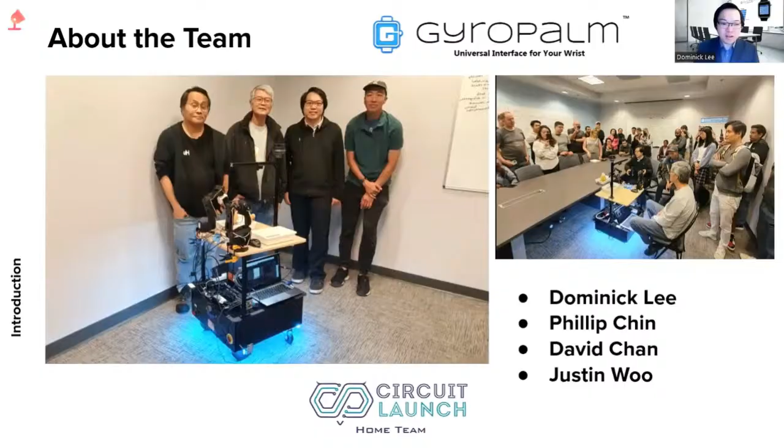Now, with that said, let me tell you a little bit more about myself. So, as you know, I'm an avid inventor, programmer, designer, and engineer. And I run a tech startup in California that provides a patented wearable technology which enables users to seamlessly control electronics, computers, robotics, and more with the flick of the wrist.

And this patented award-winning technology enables users not just to control robots, but to feel empowered and control them from a safer distance. Now, aside from that, I'm also a roboticist in residence at Circuit Launch. Circuit Launch is an innovation hub that provides labs and facilities for robotics companies and startups.

So as a roboticist in residence, I've helped various clients realize their dream use cases, especially when it comes to robotics, wearables, CAD design, and IoT-based platforms. Additionally, I'm also an honored alumnus from Purdue University, and I used to be the former club president of Purdue Mechatronics Club. It's always my passion to be able to help and lead where I can.

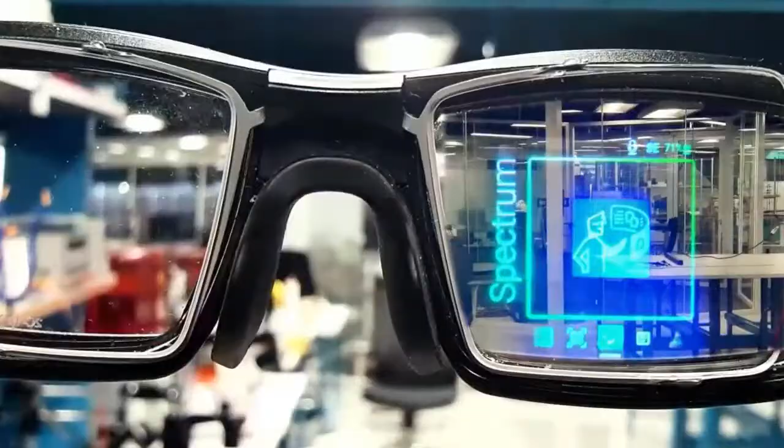In collaboration with Purdue University, one of my projects, the Gyropalm Vimpact Framework, which controls robotics, enabling them to be controlled by AR glasses and our one and only Gyropalm technology, has been featured and supported by the National Science Foundation. And some of my other works, such as the Lightbeam Flight Simulator, various workshops that I've led, as well as my discussion, my talk at Circuit Launch about AI and robotics.

These are some key highlights that I'd like to share about just things that I've done for the community and things that I passionately would continue doing as part of just exploring what's possible in the realm of innovation, robotics, and automation. Now, another thing that I'd like to share, which inspired me to build the project behind OmniFetch, is...

Our Gyropalm Spectrum product. It is actually something that's available on the market today, and it comprises of market-leading Vuzix AR glasses along with a Gyropalm wearable, all enclosed in the waterproof case.

So this is a very powerful tool, and it actually won the most promising innovation of the year at Sensors Expo. For those of you who don't know, Sensors Expo is North America's largest electronics design event for engineers. And so it's also an honor for them to feature me on their front page as well.

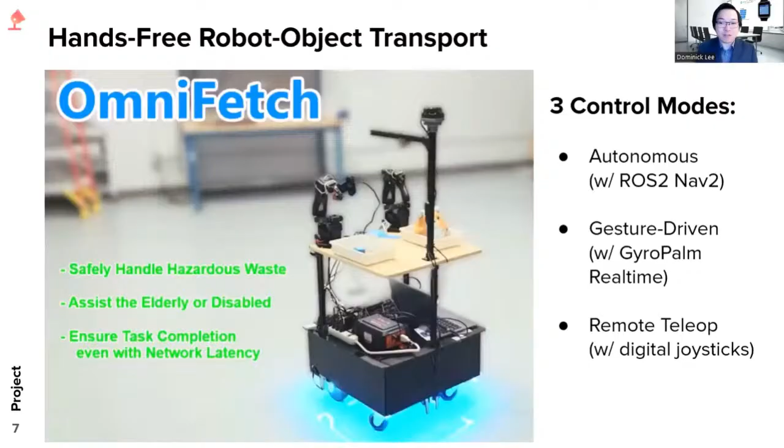To even begin with, we needed preparation for the hackathon beforehand. So we obviously had the Omnibot V2 AMR here, and we also have the Seeed Studio reComputer Mini, which was lent to us during the hackathon, as well as the Seeed Studio LeRobot SO-ARM-100. These were things that we have mounted on the robot and prepared.

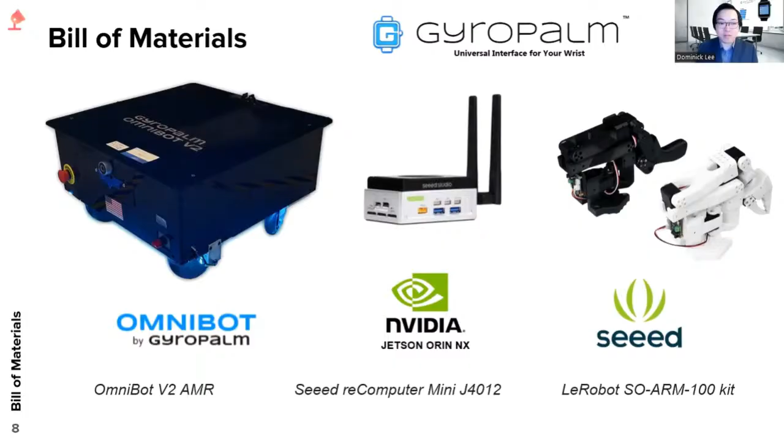In addition to that, we also have the GyroPalm Developer Kit. This is the official GyroPalm DK2, and it includes the wearable receiver base and so forth. This allows us to drive the robot and train it for SLAM mapping and navigation.

And of course, you can't do simultaneous localization mapping without the LiDAR. So we have the Slamtec S2L LiDAR, and we also have a custom wooden base, which I've CNC'd beforehand. This is something that fits right on top of the robot and allows it to mount various robotic arms and carry different payloads.

Now, we also have 2 of these USB cameras. Basically, these 2 cameras are mounted on top of each LeRobot so that you have a clear view of what's being displayed here. And you can use that as training data for the algorithms and for training the model, essentially.

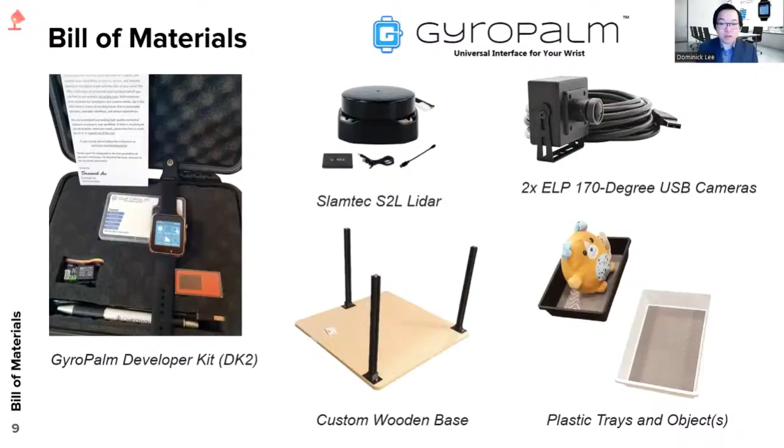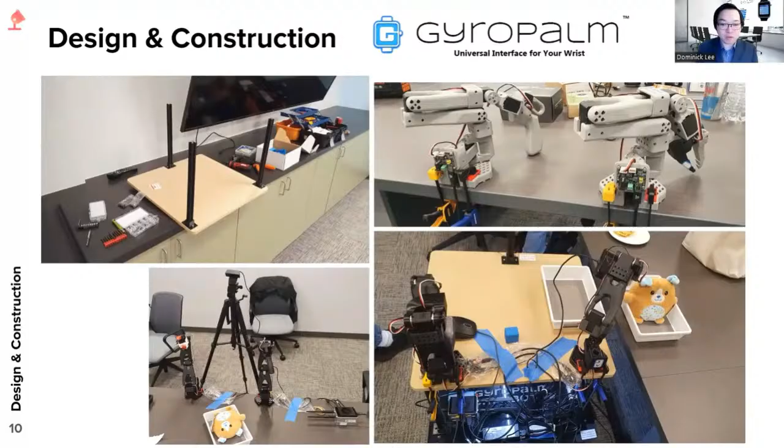We also have plastic trays and objects, and this is obviously the items that are being experimented with. Now, the LeRobot arm offers impressive precision, but to achieve that, we had to build this into the calibration sequence and modify the servos in a way that enables it to pick up objects efficiently. As you can see here, we use plastic bins so you could distinguish where objects are placed.

Also, my team and I performed this during a 36-hour hackathon. We had the pleasure of meeting with some leaders from NVIDIA who were very impressed with our innovation, as well as a quick shout out to Alex, the CEO of Circuit Launch.

Now, our ACT model was trained using collected motion data to predict the arm trajectories. This would enable the robot to go to the predicted object locations, even if these are displaced or misaligned. And we wanted to adapt to various situations.

That means in different lighting conditions, we need to ensure the robot refines its skills. So we had to train about 20 to 40 samples to begin with, and we scaled it up from there. As for the training, we trained it with a model, the ACT model initially, which is the action chunking transformer that enables it to record different episodes and play them back.

Now, in the future, we will improve the stability with a hybrid mixture of models that have more grounding to it. The current model, though, is very reliable for the most part, and it's able to drive to different places and pick up objects.

With that said, let me actually show you the video that we've presented, and this will give you a better idea of the demonstration.

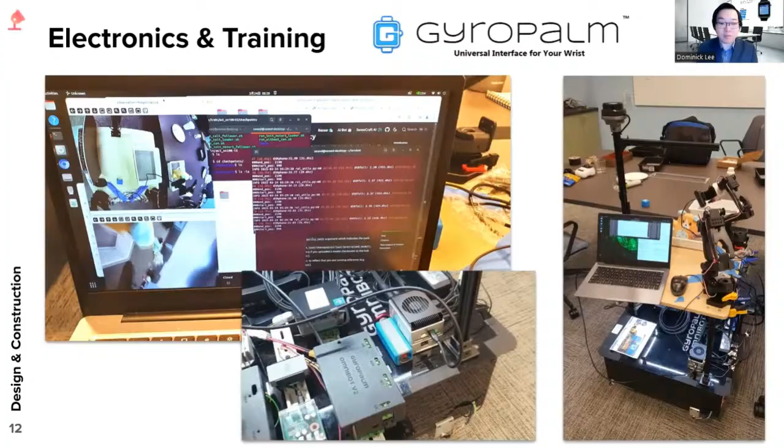Introducing Project OmniFetch, a hands-free gesture-controlled robot assistant for hazardous material handling.

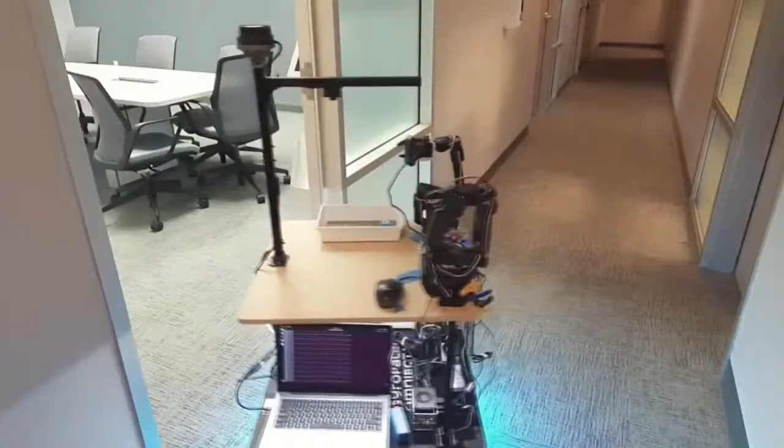This project leverages cutting-edge technologies to create a hands-free, remotely operated robot assistant capable of picking up and transporting critical or hazardous objects in unpredictable environments. By combining GyroPalm gesture control, intelligent object manipulation, and dynamic teleoperation, we've created a solution that tackles latency issues common in remote control systems, while improving accessibility for those with disabilities or reduced mobility. Our project integrates a LeRobot open-source robotic arm mounted on an Omnibot V2 mobile-based platform.

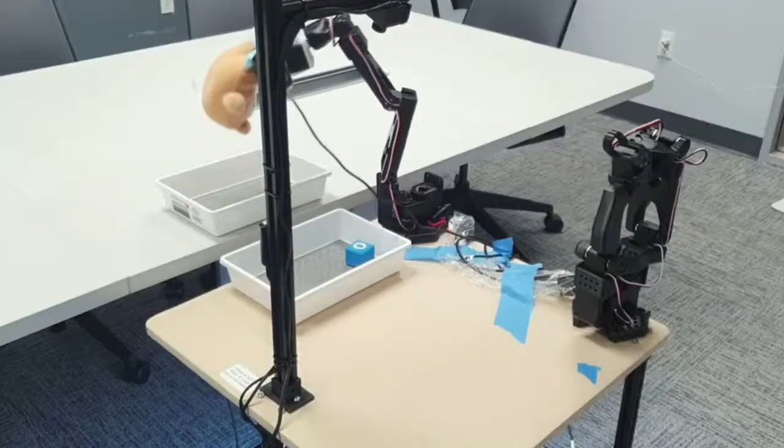Our solution has the ability to dynamically pick up objects, even if displaced or rotated, making it an ideal solution for handling hazardous materials, assisting disabled users with medication retrieval, or serving as a tabletop butler in busy work environments.

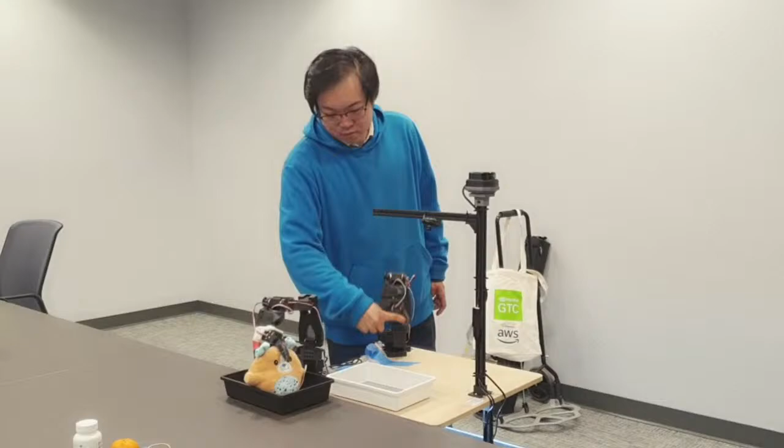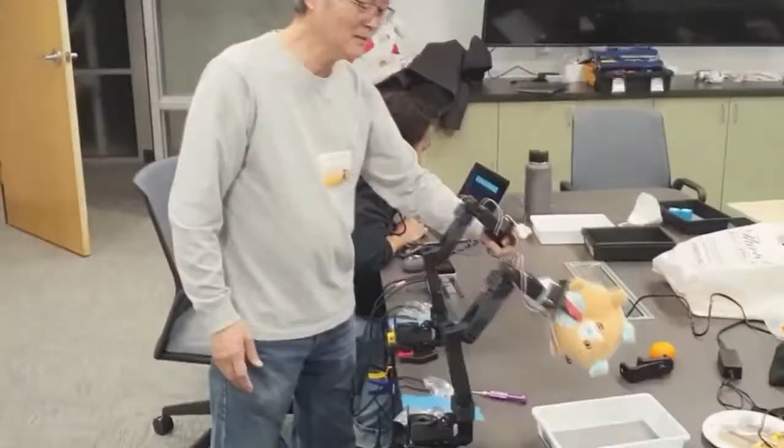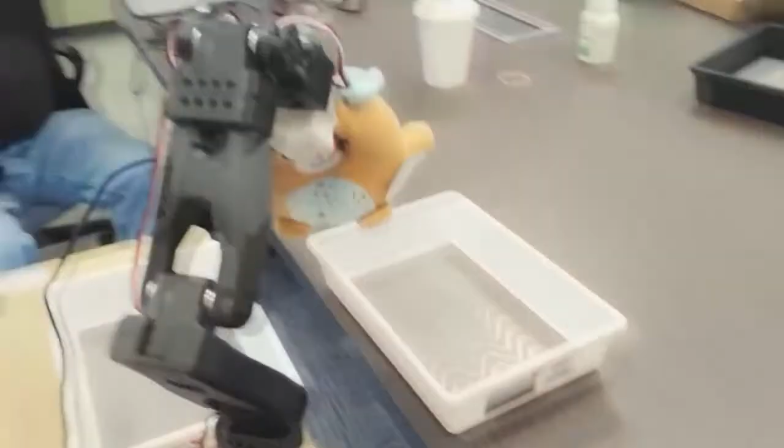Prior training is performed by the end user on various objects to demonstrate proper robotic gripping behavior. After dozens of samples, training was initiated on an NVIDIA-powered GPU computer running CUDA. Using the ACT, or Action Chunking Transformer policy, we are able to have the gripper dynamically locate objects at the closest table or workbench surface and move them onto the robot for further transportation to a designated waypoint.

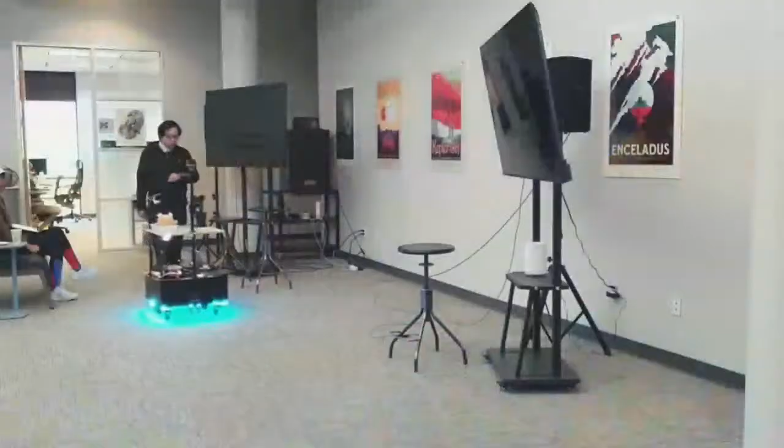The Omnibot then autonomously drives to the designated location, or optionally can be driven by a human operator using gestures with the GyroPalm Encore wearable.

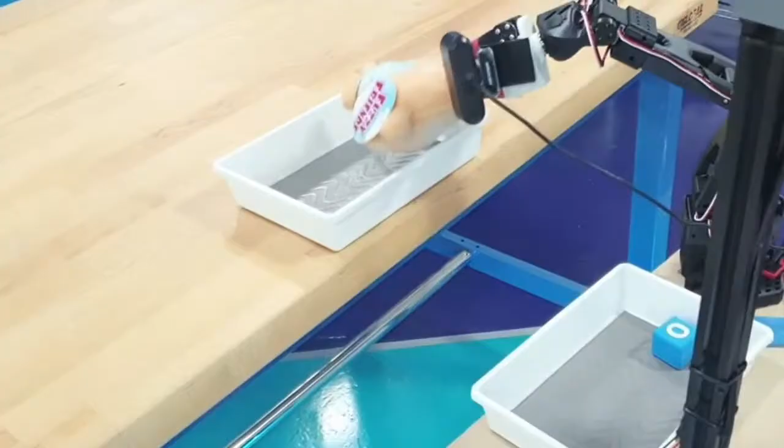We hope our project inspires further advancements in accessible robotics, leveraging hands-free control and adaptive learning to create smarter, more responsive machines that empower human operators while accurately accommodating for imperfections in the robotic control paradigm.

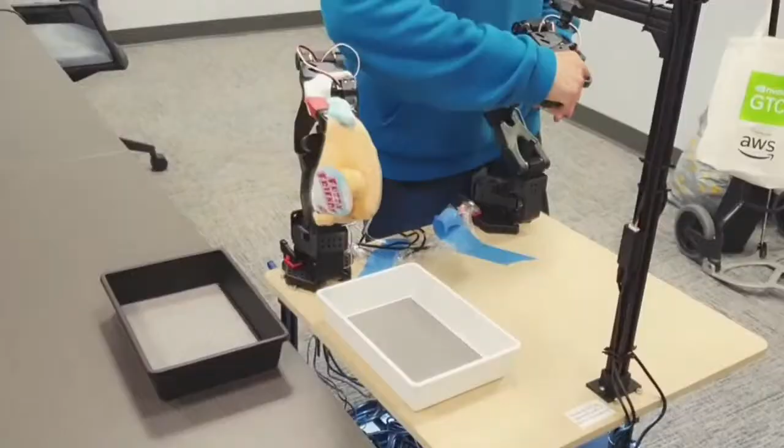As you can see, this robot is very effective, and it's become a proven project that showcases intuitive and reliable object handling using AI and gesture control. So we're currently in close works with Purdue and some industry leaders to bring this technology to more labs and facilities. And this robot can be flexibly upgraded with better robotic arms in the long term.

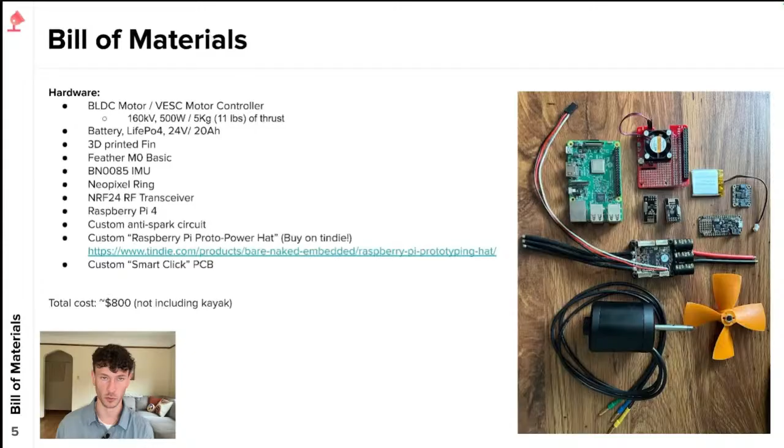Kind of a system level overview: I have the kayak portion and the paddle controller half. The kayak half is this Pelican case with a battery, motor controller, custom printed fin, and everything.

The brains of the kayak half is the Raspberry Pi. Eventually it's going to read from this GPS module, sends commands to the motor controller, and eventually is going to run the machine learning models to tell the motor controller how to drive the motor.

The paddle controller is this guy here. It has the IMU inside, a NeoPixel display to show stuff to the user, and this user button here to set different speeds and modes and things.

And there's an RF comms link with those NRF24 boards to stream data between the kayak Raspberry Pi and the paddle controller itself. So the paddle controller can send IMU data, and the Raspberry Pi can send back motor feedback data.

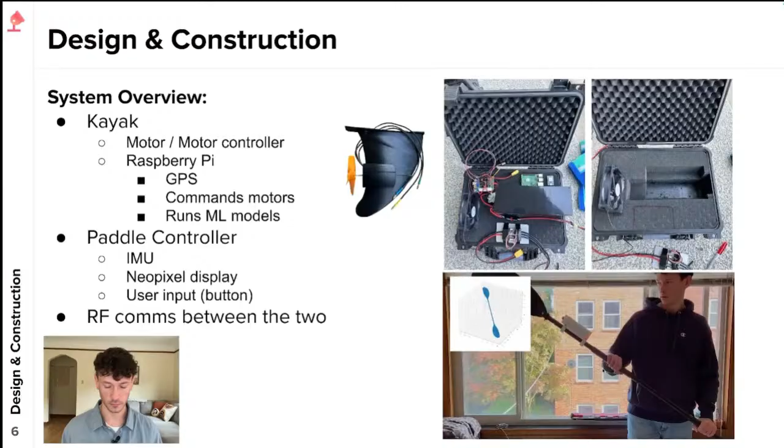I don't have a lot of time to go into the details of the kayak side. I'll talk mostly about the paddle controller, but there's a part 1 video down here on my YouTube that goes into way more detail if you're interested in learning more.

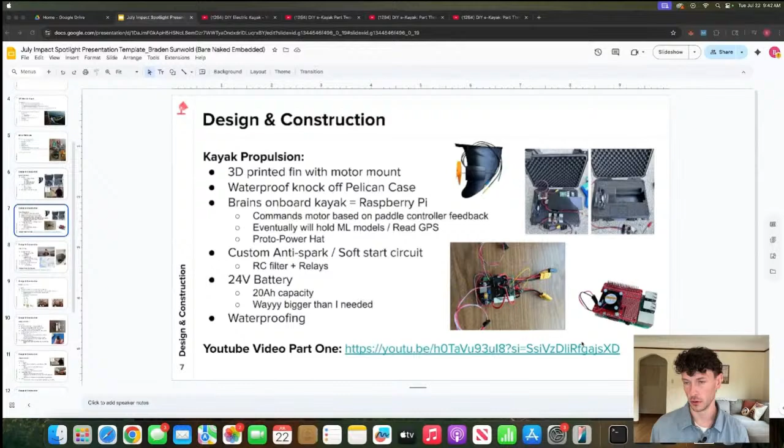My initial testing started in a bathtub, just trying to get current draw versus RPM and tune the PID controllers, but it was too shallow and I kept sucking in air. So eventually I just had to get out there on the lake and see if the thing worked or not.

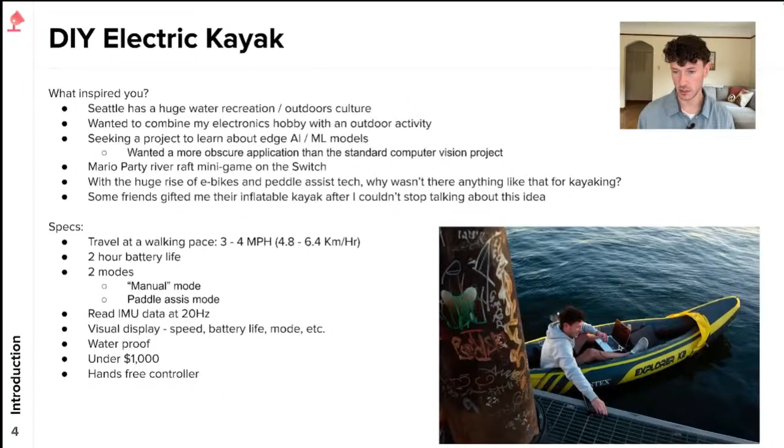On my first voyages, I just had my computer sitting in my lap like this, because I didn't have the paddle controller finished yet, so I had to drive everything from the computer. So I'm just out there in the middle of the lake with a computer in my lap.

On the first voyage, I got PID tuning done, took temperature measurements, current draw, and stuff like that.

So for my range test, I'm estimating I went like 12, maybe 14 miles, and I almost got stuck right in the middle. It just turned out there was seaweed in the props, and I luckily got it running again—otherwise I would have had to paddle back to my car for like 4 miles. But I've also got a video on that full range test down here if you're interested, on my YouTube as well.

Here's a little sneak peek of what it looked like with me in the kayak with just a computer in my lap, cruising along at a few miles per hour. Everyone just gave me super weird looks, like they thought I was working remote from a kayak or something.

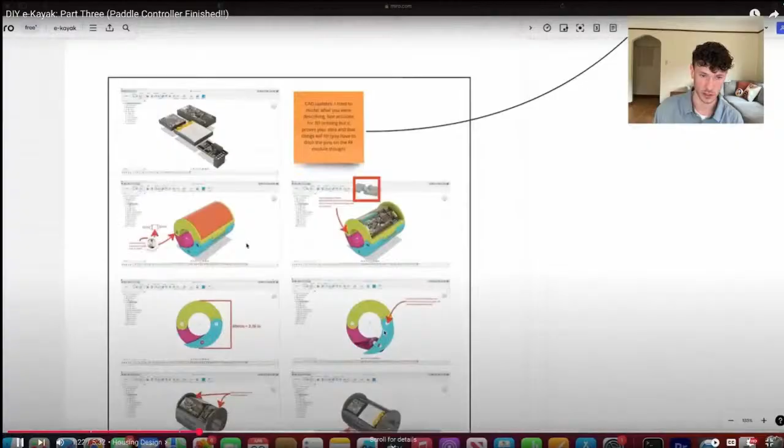The paddle controller itself - my friend Jordan Godoy, a super talented designer and 3D modeler, made the 3D printed mounts for me. I gave him my inspiration of a barbell clamp for weightlifting that would slide onto the paddle and clamp down. He took that and ran with it, and we went through a few iterations. First we put all the electronics inside the clamp like this, but realized we'd have to make custom gaskets and it would be really hard to waterproof. So we moved to a cylindrical design that we could easily waterproof with just a couple O-rings, which was a lot easier to work with.

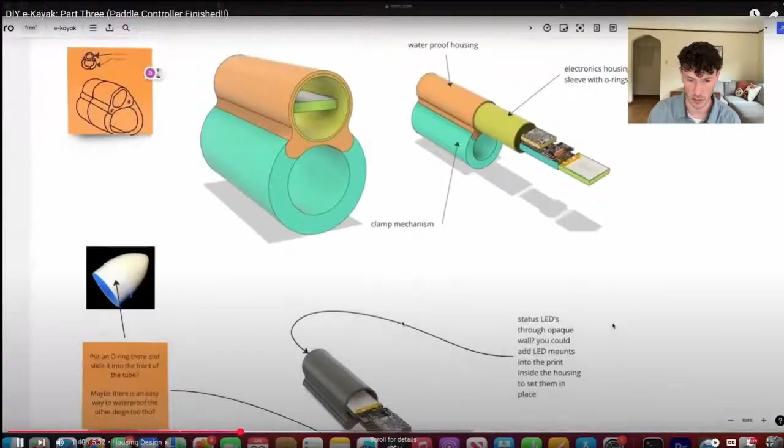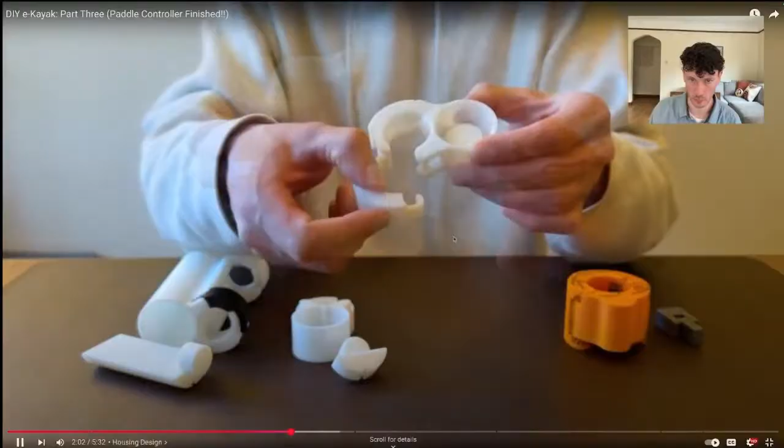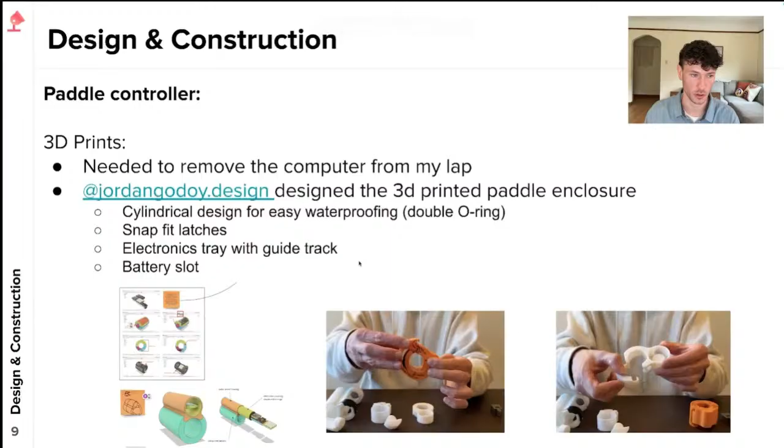You can see down here is a cap with some O-rings. After that, he started 3D printing and iterating on different designs and clamps, and eventually got to this hook-style clamp design that's super strong. We had to put some squishy foam between the 3D prints and the paddle to give it more traction and squish and keep things from wiggling around. He also designed a slot for the electronics tray to slide in on a track into the cylinder, keeping everything secure, plus a little battery slot to hide the battery and save some room. Some cool little features.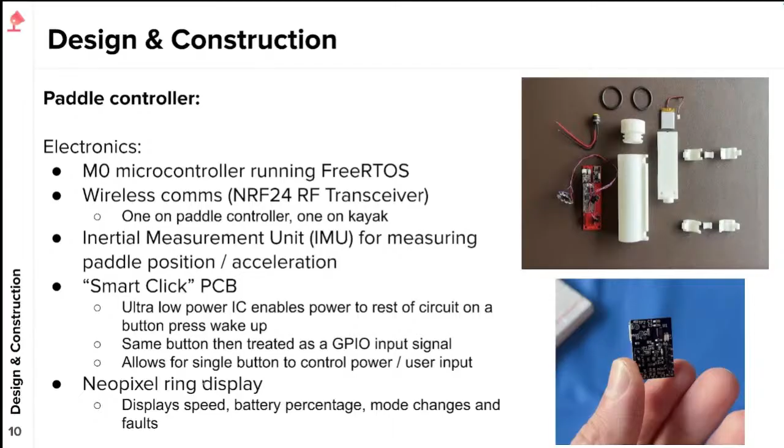The paddle controller firmware running FreeRTOS has a few different components. The RF components handle reading and writing - the paddle controller reads battery voltage and motor speed from the Raspberry Pi, so it can indicate to the user the speed and how much battery we have left. It actually reads the kayak battery and the paddle controller battery and reports the lower of the two. Then it writes back to the Raspberry Pi speed commands, mode commands, and streams all of its IMU data.

It reads button inputs from the user and can decipher between single and double clicks. A double click toggles between manual mode and paddle assist mode, and a single click when you're in manual mode toggles through the 3 different speed settings. It also reports faults, showing things like motor fault, comms fault, high current, temperature, and that kind of stuff.

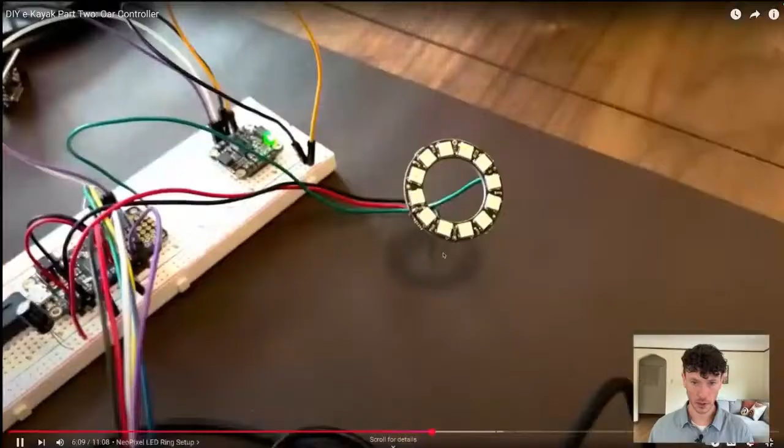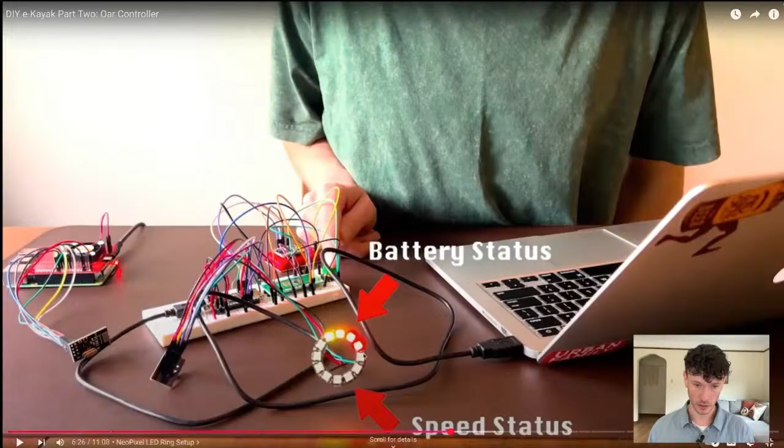This is the connecting animation, trying to connect to the Raspberry Pi on the kayak. This is the fault animation. This is if we get a connection - it runs through this startup sequence. Then you can see once we're connected, the left side here is the battery status, going from 0 to 100%, red to green. Then the speed status down here - I'm cycling through a few different speeds here, so that's low, medium, and high speeds get displayed out as well.

And then the paddle controller itself, this is kind of it going together with the 3D printed enclosures. So it slides into the track there, and the button is built into the lid with the O-rings that waterproof everything. Once it gets turned on, single presses cycle through those speed settings.

And then on the left side here, you can see the battery right now is at 50%. The last demo I'll show you is the IMU data.

And speaking of, that's the next steps and kind of improvements. Right now I have Jordan working on an upgraded 3D printed fin that actually has a servo inside of it so we can control the direction of the fin.

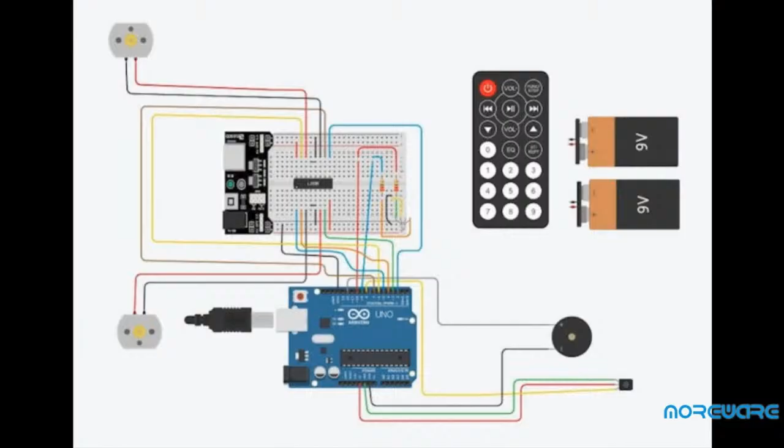A polystyrene parallelepiped was taken and cut into the shape of a boat with a knife. Subsequently, a series of holes were cut inside, into which the motor's batteries were inserted.

The circuit was placed above the hull, covered by the ice cream tray to obtain greater circuit protection and better aesthetics. To fix the IR receiver in position, to receive the signal...

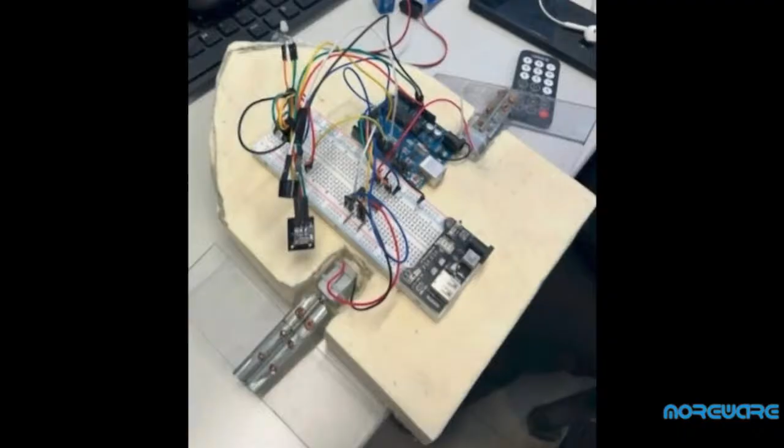The plastic tray was then fixed to the hull using wire. It was cut to obtain a satisfactory aesthetic result.

We carved the structure to show the LED at the top of the tray. Finally, the blades were printed in 3D in PLA using the Ender 3 printer.

Various difficulties were encountered in the implementation of the project. First, the search for an idea in line with our initial knowledge. Many projects initially appeared interesting, but upon further analysis turned out to be too complex for the level of knowledge gained by the group in the short space of the course.

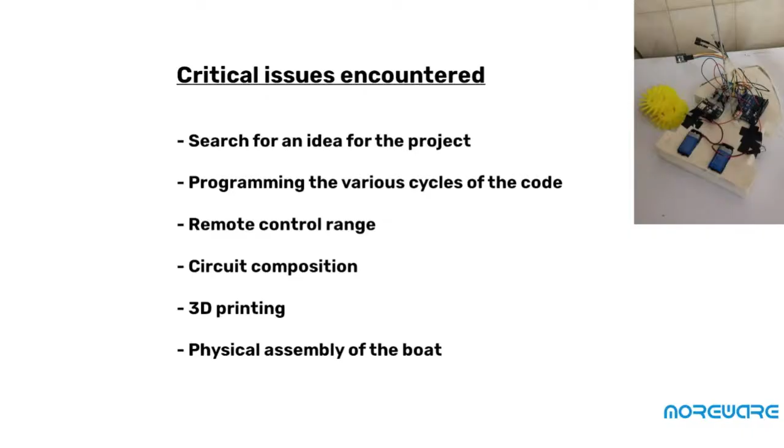Programming the various cycles of the code was another challenge. Although managing an individual sensor or actuator is trivial, adding more components to the project increases its complexity exponentially.

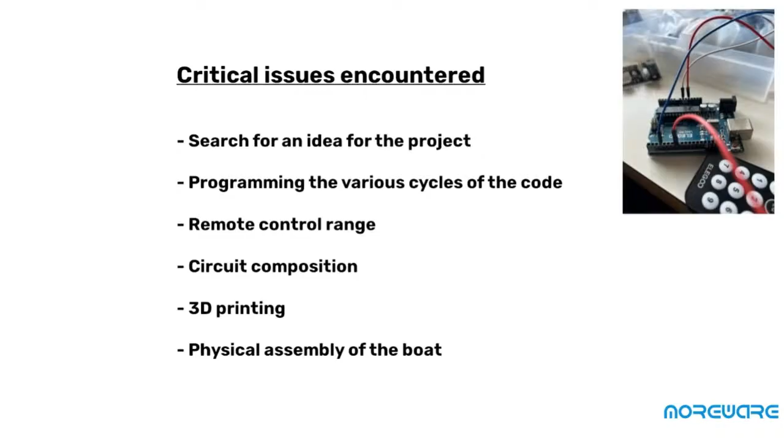Remote control range: the IR remote control, although equipped with a debouncing system for button presses, has a decidedly limited range of action. For this reason, the next version of the system involves using a steering system through web services connected via Wi-Fi to a cloud.

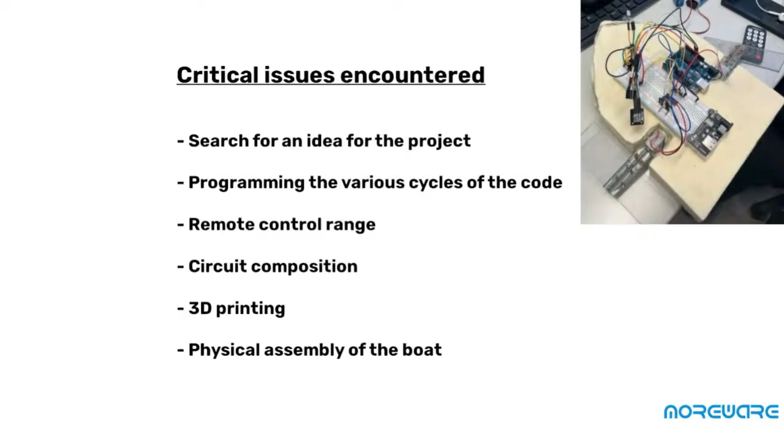Circuit composition: an H-bridge with a pair of engines. We had to learn to manage the functions and activation times of the paddle engines in water, studying the power necessary to make the vessel move and curve without causing hydrofoil effects.

3D printing and printing time: printing times for the blades were always higher than expected, both due to their complexity and the waiting queue. Furthermore, we had to test different shovel models with different curvatures, to allow advancement without affecting too much the power required.

Physical assembly of the boat's cable management: contrary to the usual projects, the boat had to function in water. We therefore had to provide a waterproofing and protection system for the electrical circuits.

Future extensions: for version 2.0 of the project, it was decided to improve the skeleton of the boat by making it more waterproof, faster and lighter, installing more powerful engines and even more efficient blades. Furthermore, it was decided to make it an amphibious vehicle, installing blades with different shapes and wheels to reduce friction with the ground.

Let's have a look at the code. As you can see, we only need the IRremote module.

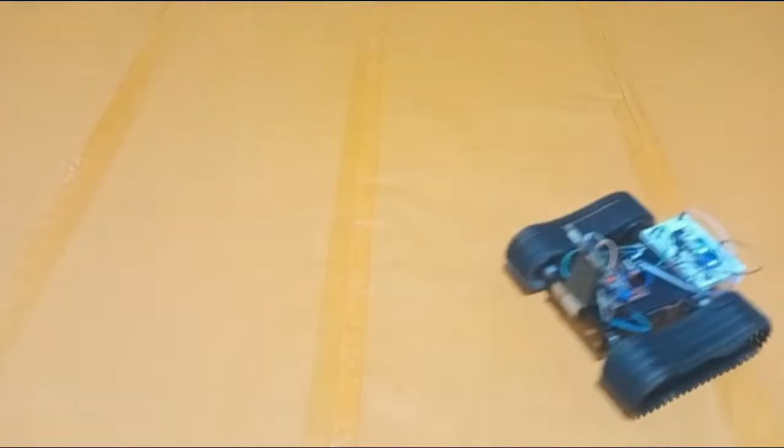Please check it out. We are Team Garud from the University School of Automation and Robotics at GGSIPU, New Delhi, India. And we are proud to present our ROS Ranger Mini project, an advanced autonomous mobile robot, also known as AMR. Before we dive into the technical specifications, we'd like you to meet the minds behind the machine.

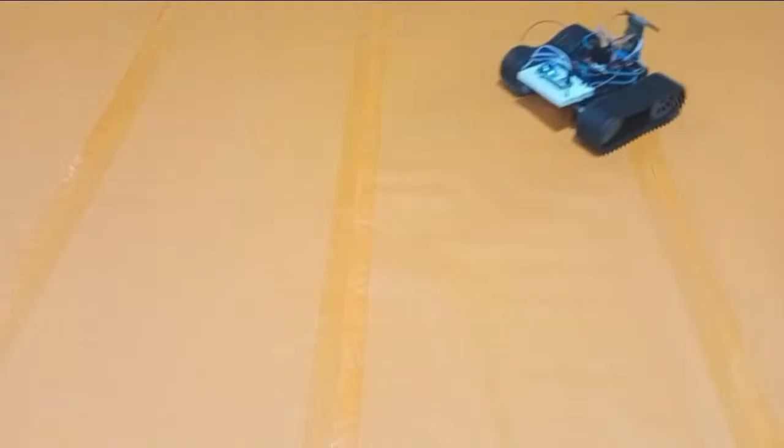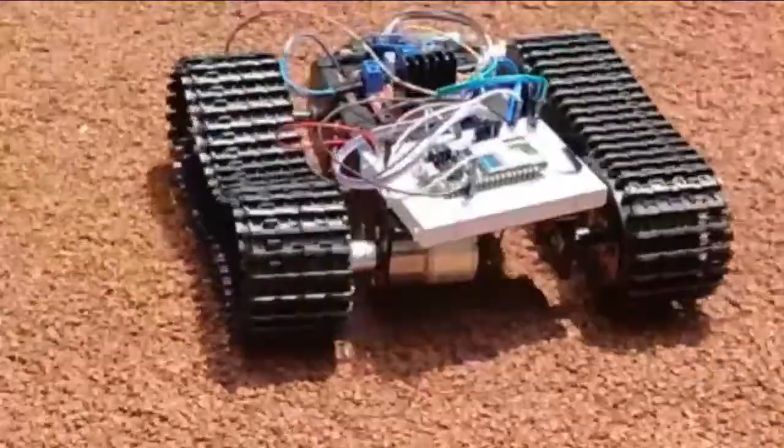Our team consists of 5 members, each with their own technical specialty: Harshit, Vishal, Parth, Harneev, and Shlok, the group who put in an all-out effort in building this project. Harshit led the mechanical design, Vishal engineered the embedded systems and wireless connectivity, Parth developed the ROS software and SLAM algorithms, Harneev integrated all the hardware and sensors, and Shlok made the mobile app for remote operation. We hope you enjoy our video and learn something new today.

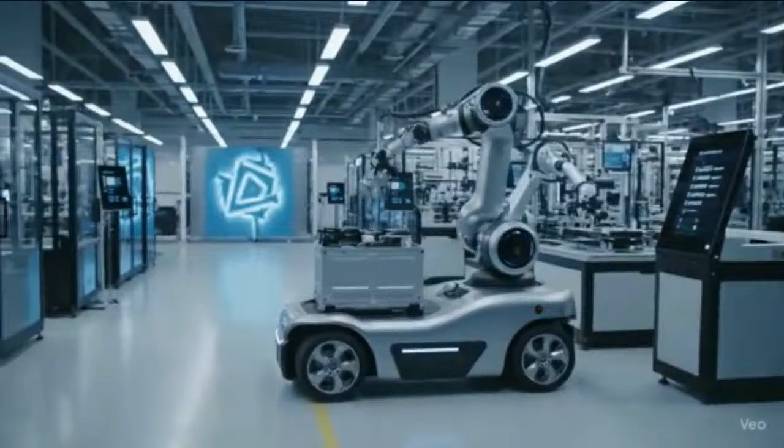Autonomous mobile robots represent a paradigm shift in intelligent automation. Fundamentally different from traditional guided vehicles, these sophisticated systems navigate dynamically, using advanced sensors and artificial intelligence, adapting to their environment in real time. AMRs are transforming industries at an unprecedented scale, revolutionizing warehouse operations, optimizing healthcare logistics, and advancing agricultural monitoring systems. Unlike conventional automation, they think, learn, and make decisions independently.

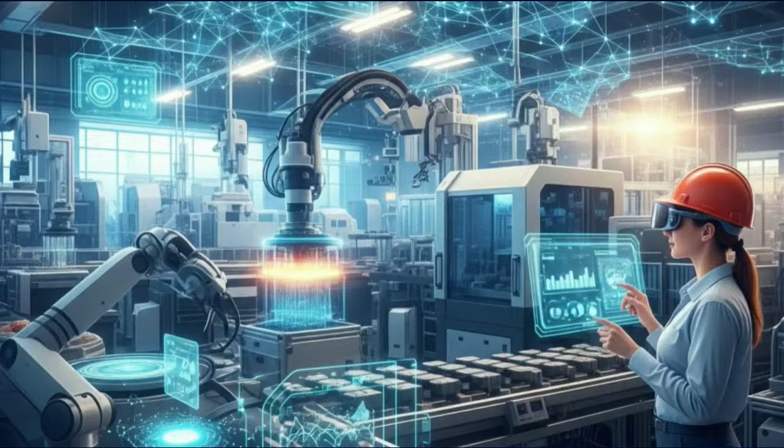The global AMR market, valued at around $21.5 billion, is experiencing remarkable 23.7% annual growth, reflecting their critical role in Industry 4.0. From manufacturing efficiency to autonomous deliveries, AMRs are not just the future of robotics, they are reshaping how we approach intelligent automation today.

There are two main options for programming the Photon, using VS Code or the Particle Web IDE. Although I initially tried VS Code, I encountered a few issues, so I switched to the Web IDE, which offers a simpler and more intuitive interface. One key advantage is that it's already linked to the particle cloud, so there is no need to write additional code for Wi-Fi or cloud connection. I just wrote the firmware, selected the device, and flashed it directly to the Photon 2.

In our project, we used MIT App Inventor to create a simple mobile app that communicates directly with the Photon 2 via the particle cloud. This allows us to control the robot remotely over the internet using clean, touch-friendly controls. We started by visiting appinventor.mit.edu, signed in with a Google account, and created a new project. The user interface was designed using drag and drop components, buttons labeled with forward, backward, left, right, and stop. In the block section, we programmed each button to send an HTTP post request to a particle cloud function hosted on our Photon 2.

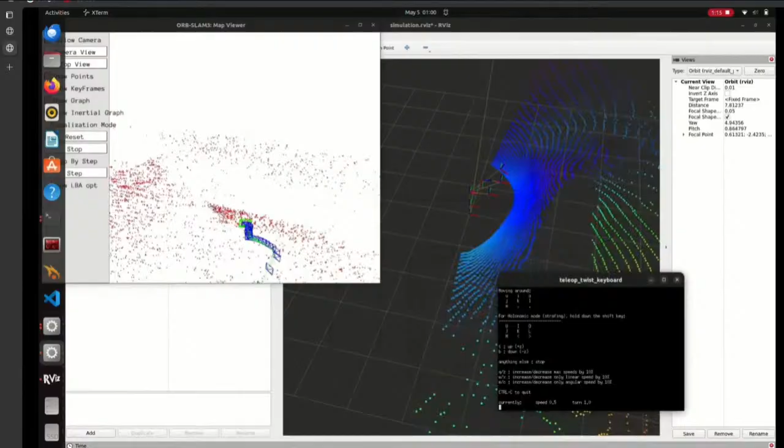One of the core components of our AMR project is Visual SLAM, and for this we have been using ORB-SLAM 3, one of the most advanced and versatile SLAM algorithms available today. SLAM, or simultaneous localization and mapping, allows a robot to build a map of an unknown environment while tracking its own position in real time. Unlike traditional SLAM systems that depend heavily on expensive lidars or depth sensors, ORB-SLAM 3 is purely vision based. It works with monocular, stereo, or RGB-D cameras, making it highly cost effective, especially for budget sensitive applications like ours.

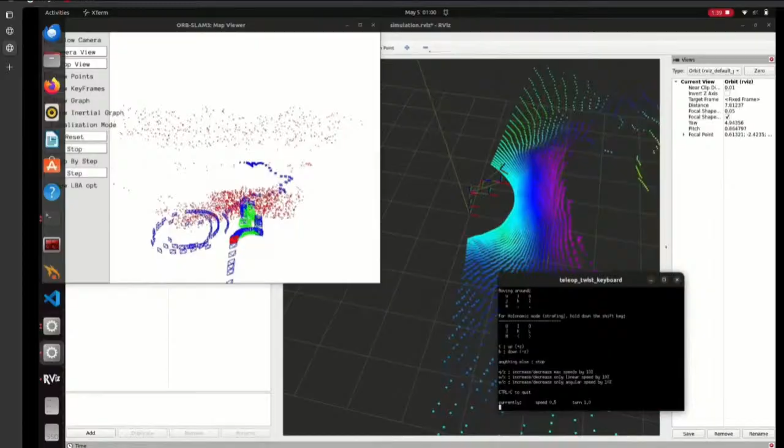Now, here's why ORB-SLAM 3 is truly special and a perfect match for our use case. First, it supports multi-map tracking and loop closing. This means it can seamlessly detect when the rover revisits a previously seen location and adjusts the map accordingly, reducing drift and improving accuracy over time. Secondly, it offers full support for real-time localization even in large or dynamic environments. Whether the robot is moving fast or operating in a cluttered space, ORB-SLAM 3 remains stable.

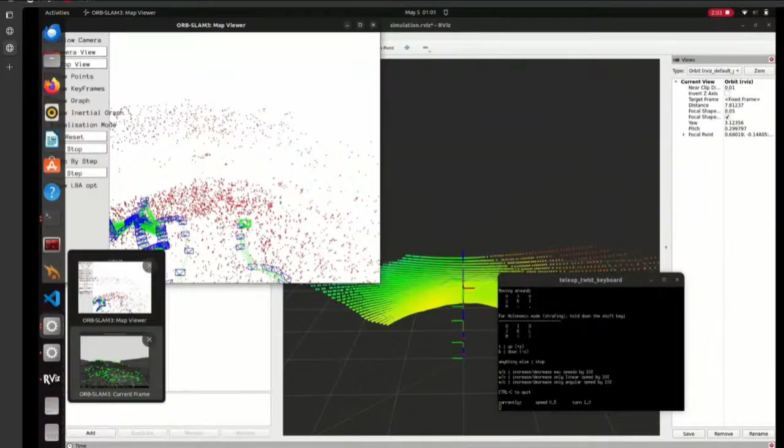Third, and this is a game changer, ORB-SLAM 3 is the first open source SLAM system to unify visual, inertial, and multi-map capabilities in one framework. This gives us a lot of flexibility as we scale or modify the project. We are not locked into one type of sensor or dataset.

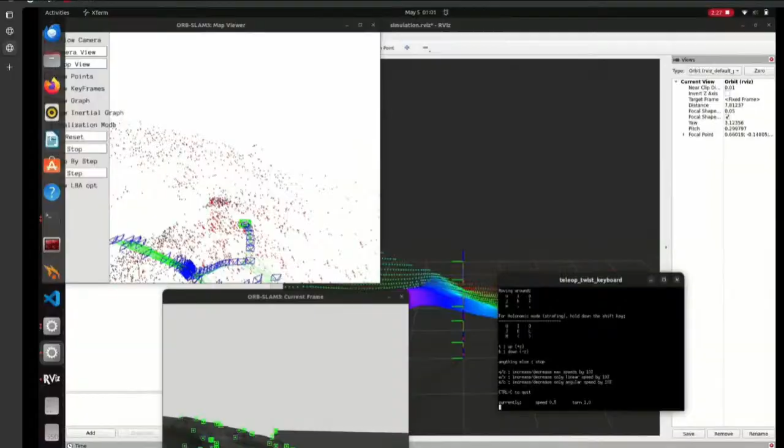In our simulation, ORB-SLAM 3 is running on synthetic camera feeds and successfully tracking the robot's motion across rooms, generating sparse 3D maps in real time. This helps us verify that even without a lidar, we can achieve precise mapping using only a camera and smart algorithms. By choosing ORB-SLAM 3, we are cutting hardware costs without compromising on accuracy, and we're laying the foundation for autonomous operations in complex environments.

In future iterations, we can even extend the system to support visual inertial fusion or multi-robot mapping, all within the same framework. So for now, ORB-SLAM 3 is powering the robot's eyes, giving it the ability to perceive, map, and move confidently even in GPS denied or unknown spaces.

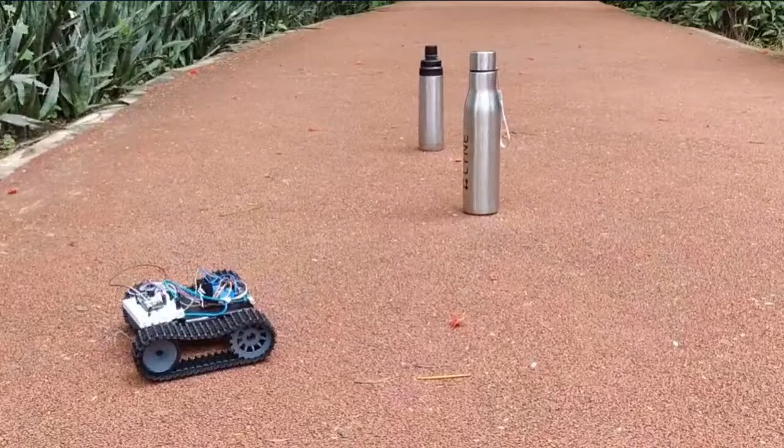The future of robotics is arriving faster than ever imagined. Picture robots that learn and share knowledge with each other, creating an interconnected network of intelligent machines. Our ROS Ranger Mini will evolve to recognize objects and people, making decisions that seem almost human like. Imagine multiple robots working together like a perfectly coordinated team, sharing maps and coordinating tasks without any human intervention. These robots will process information instantly right where they are, making split second decisions for better performance. With high speed internet connections, they'll tap into cloud based intelligence, becoming smarter every day.

The robotics industry is exploding, growing from $71 billion to $150 billion by 2030. Soon, these intelligent machines will help in rescue operations, monitor our environment, assist in farming, and become a part of smart cities. We're not just building robots, we're creating the foundation for a world where intelligent machines work alongside humans, making life safer, more efficient, and remarkably more connected than ever before.

For the conclusion, our ROS Ranger Mini represents the vision of accessible and intelligent automation. By combining cutting-edge technologies like the particle photon, intuitive mobile interfaces through MIT App Inventor, and robust ROS simulation environments, we have created a scalable platform for autonomous operations. This project demonstrates how emerging technologies can be integrated thoughtfully, which can lead to solving real-world challenges